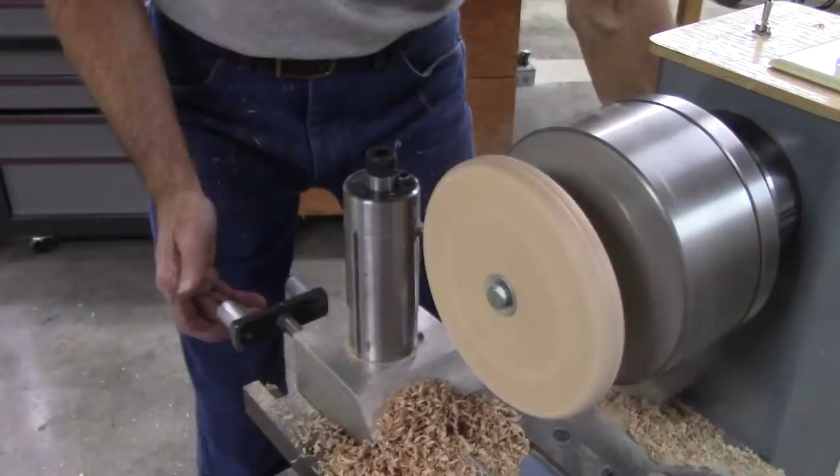I built this wood lathe here, kind of like a metal lathe. It's got a cross feed, a saddle. It's got a power feed. Variable speed. It's got a drill motor powering it, and I've got a light dimmer up here to control the speed.

This video is going to go into how I constructed this lathe, and future videos will go into how to use it. It's also got a tracer attachment on the back. I've made a pulley maker attachment that clamps in the chuck. It's a very capable lathe. I'm really pleased with it.

It's basically done. I'll probably add a few guards. I'll put a guard over my pulley here so I don't stick my finger in it. Maybe put a dust guard over the drill motor down here. But it's basically done. One other thing I'd like to do is hook up a vacuum attachment.

It makes quite a mess. I cleaned up the lathe a little bit, but look at the floor. It's a lot of dust. But anyway, let's get on with the build video, and I think you'll find it interesting.

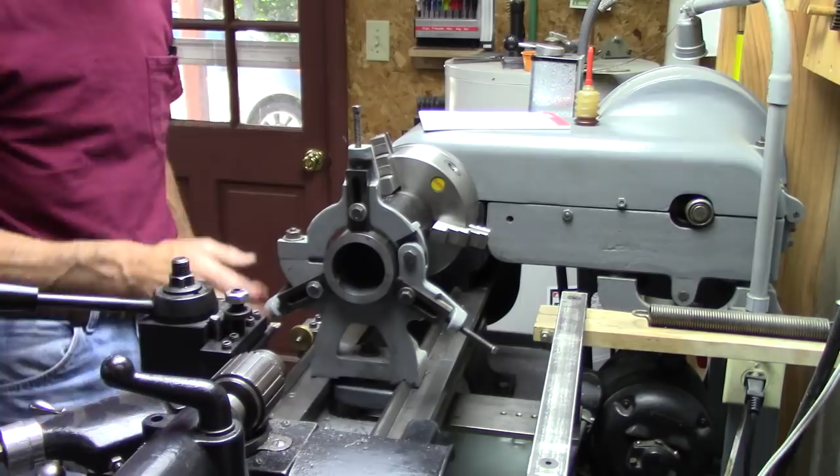Okay, I've still got the lathe set up from cutting this bearing fit, so it should go pretty smoothly. This is the first time I've ever used this steady rest, and it worked really well. Okay, I've got the steady rest all set up. The outside of this tubing, somebody used a pipe wrench on it, and I filed it off pretty good, but it's going to be noisy. It won't hurt anything. But it's going to make a racket. You'll see.

Check my depth of cut here. Taking about 20 thousandths at a time. Okay, we're almost there. I've got some hole gauges, but I don't have a 2 to 3 inch mic to measure that. It's 2 5/8 about. So I'm just going to have to be real careful and go a little bit at a time, keep testing this. I know where I was on the other end. I got the dials marked here, so we'll just keep cutting.

And I think what we're doing now is just taking the spring cut from the boring bar. Yeah, I think I'm going to try to get that with sandpaper. I don't want to go too big. Well, I used a little emery cloth on it. I think it's just perfect now. Good press fit. There it is. That's the spindle bearings.

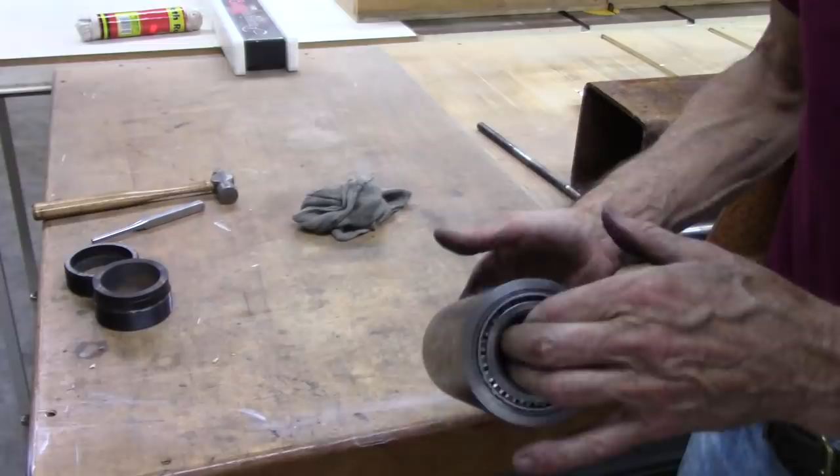Now I think I'm going to put a center in there so I can move this steady rest out of the way. Okay, I've got my steady rest set up. I got a grooving tool here. I'm going to cut a slot right here and put an 1¼ inch locking collar.

This is an 1.5 inch shaft, but the locking collar groove is going to serve something for my bearing to set up against, plus a chuck set up against the other side, and it will allow a relief when I thread this area for the end of my threads. It'll probably be more clear later. I'm using the cutoff support plate that I made. I got another video on that. It really solidifies things. So let's see what it does.

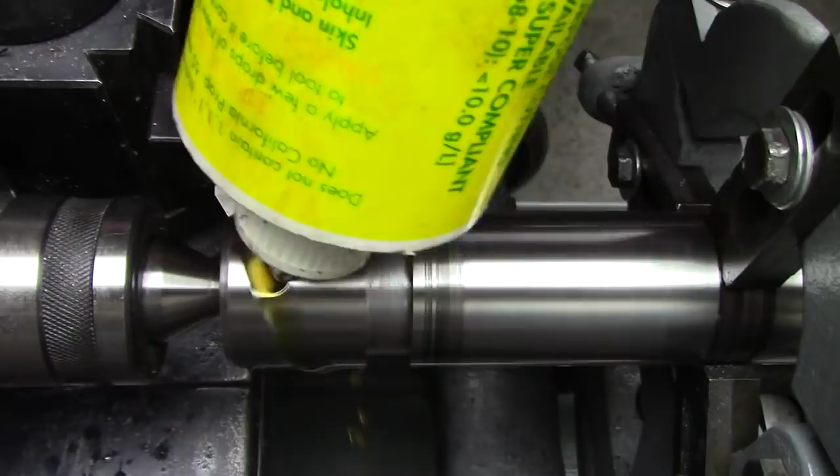Okay, here it goes. Put a little oil on there. See what we can do. I haven't cut threads in a while. Okay, we're just barely touching there. Now we're cutting.

Okay, definitely tight. That won't go on there. Well, there they are. I think my threading tool was a little bit dull, but I think it's going to work out. Chuck screws on there, and after I get that locking collar in there, it will seat and hopefully make it straight. It's fairly straight right now though. And I certainly think it'll be good enough for a wood lathe.

Okay, I've finished the threads and I'm really pleased with them. I'm going to take this out and turn it around and turn this end down for a step pulley.

Okay, I finished the sleeve here and pressed the bearing outer races in on both sides. Now I need to get an accurate measurement from the inner race on both ends. I don't have a caliper that big for dividers or whatever, so I came up with this. I know it's kind of makeshift, but it works. It works pretty good actually. Looks like a little over 8 1/8.

So the lock collar I'm going to get is 1/2 inch thick. So I set the edge of the threads there on a 1/2 inch, and right about here will be where the outer race is on the bearing.

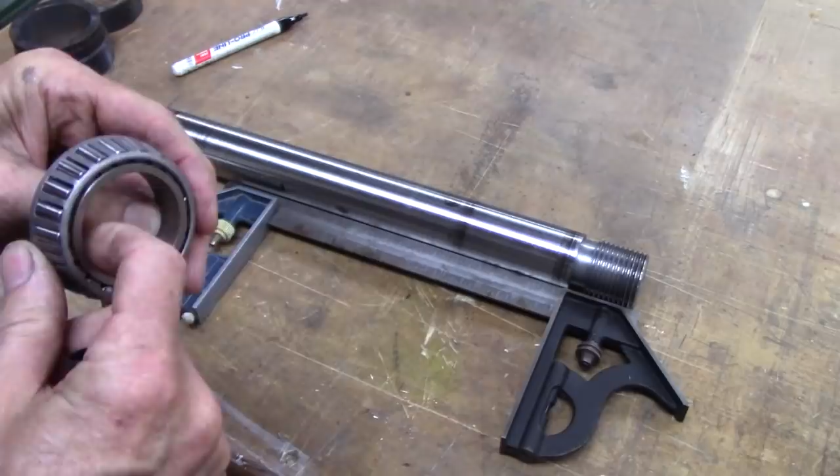I'm going to put 1/2 inch threads and a clamping locking collar on this end. I don't want the threads sitting on the inner bearing race, just a little bit. So I'm going to go in about right there, 1/8 inch in. I know that's kind of crude measuring, but it'll work. And then I'm going to thread from there on out about 1 inch, and then reduce the shaft the rest of the way to 5/8.

Okay, I put the big chuck back on my lathe so that I wouldn't have to clamp on the threads. This chuck's a little deeper, and I was able to clamp on the actual shaft. Put my steady rest back on. It seems to work better with the steady rest. I got my center here. I'm going to turn down this section to 5/8 of an inch. It's quite a bit of turning, so let's make some chips.

Well, there it is. That was a whole lot of turning there, but it's done. It's 5/8 of an inch. I'll have to cut a key in that. And I got to cut some threads right here for a threaded locking collar.

Well, it took some doing. I was going to try to drill a hole and then use a boring bar and make these holes a little bigger. That didn't work too good. I got a problem with clearance on my mill here. Couldn't put a large drill in there and still have enough clearance to drill the hole. So I decided to try a hole cutter. This one's made by Milwaukee. Seems to be a good one.

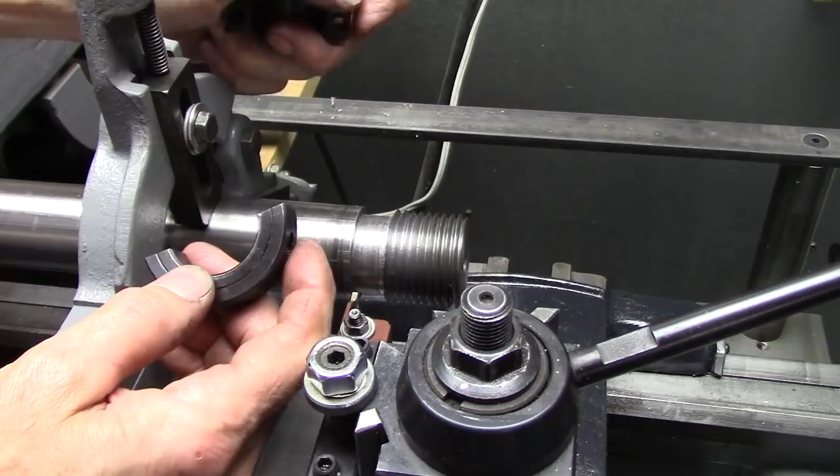Okay, I've finished cutting this groove for my locking collar. I took away from the threaded side a little bit. I got plenty of threads, and I may end up cutting some of them off. That's quite a bit longer than my metal lathe spindle, maybe an 1/8 inch or even a 1/4 inch longer. But yeah, we'll just see how that goes, see how it works with the chucks.

But I think I got a good fit on this. Let's see what we got. I wanted a really tight fit, and I can just barely get that in there. It's exactly what I want. Yeah, it's all the way tight, I think.

Now the real test coming up here is to screw the chuck on there and see if it runs true. Okay, here it goes. I'm not really sure what keeps the chuck centered this way. I guess it's just the bevel on the threads pulling when you tighten it. But the lock collar, or this surface here on your metal lathe, I'm sure helps the chuck stabilize this way.

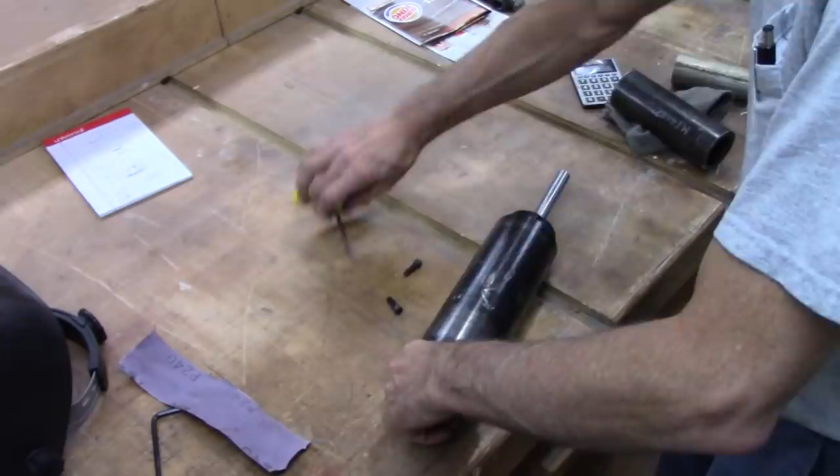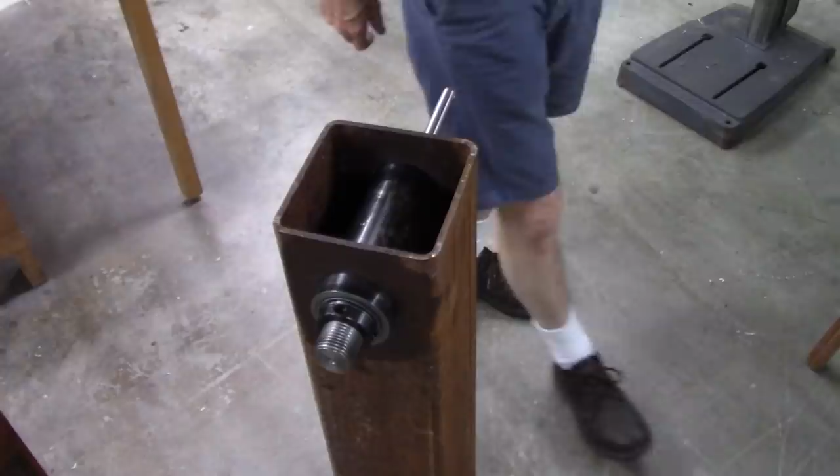Of course, it's noisy right now because I don't have any grease in it, but that's pretty good. Of course, I don't know. I'll probably have to tighten that until I have a little bit of resistance and then back off a little bit. The next step will be to clean up this piece of steel here. And weld that tube into my, I guess you could call it my headstock.

Okay, I'm going to weld this thing. I'm not a welder, so I'm going to do this off camera and wish me the best. Well, there it is. Still a little warm. Like I said, I'm not a welder, but I guarantee it'll hold. That's a lot of surface area.

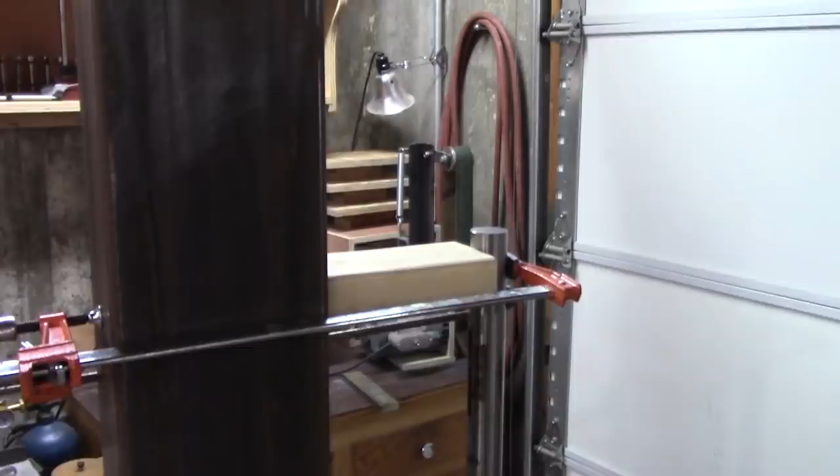Well, I got a metal lathe chuck in there, and I chucked a 1.5-inch bar in there, and believe it or not, I gave it a spin, and there was very, very little run out at the top, no visible run out. Then I clamped some 7-inch blocks in there, and I visually aligned it this way. I'm lined up as near as I can tell perfect. And I know it won't be metal lathe perfect, but it'll be plenty good for a wood lathe. I'll strive for perfection and hope for the best. Well, it's time to weld it.

Just to avoid any distortion, I'm going to weld one side a little bit, then go to the other side and weld. I really don't know, I'm not experienced enough to know how to avoid this distortion, but I'm going to do my best.

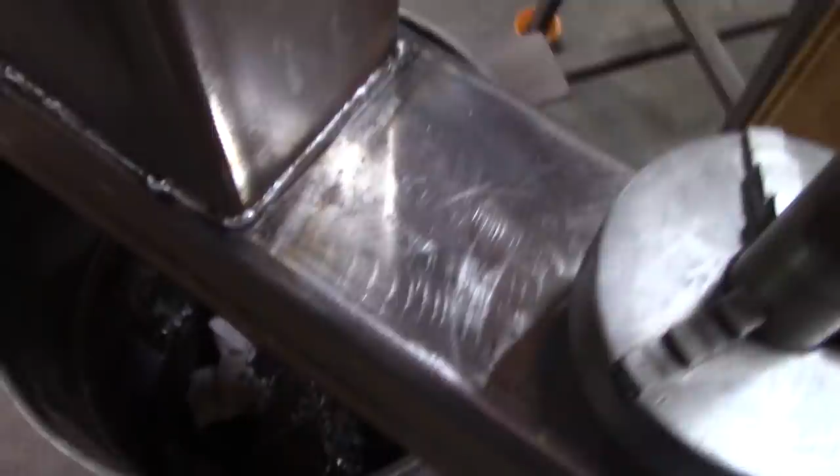Well, I got it all done. I'm getting better at this. I guess you got to learn somehow. Figured out what I was doing. It's a 110 MIG I'm using, and I was trying to get too much penetration and staying in one spot too long. And after I started moving faster, it made a nice weld.

Well, here's what I've done. I decided to just weld a piece of channel on the bottom. It'll have like a pedestal mount here. The bottom support's a little bit longer in the back, because the motor will hang off the back. Next step will be to cut a piece of steel to fit on the top. I got this surplus piece of steel here.

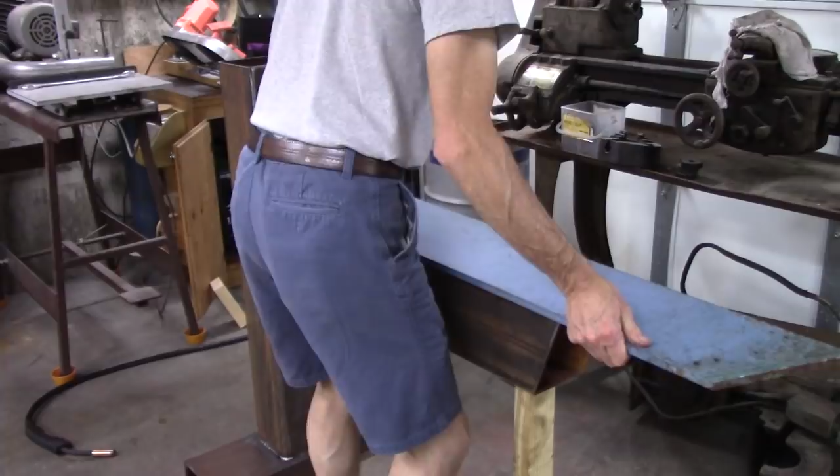And I'll cut that off flush, and then cut it to length here. I was thinking about wrapping it around the headstock. Just about that far. That way it'd give cross slide. I could notch out the cross slide where it gets up close to the chuck. But I'm not sure I'll do that or not.

Okay, I've got my bed plate cut to length, and I've drilled a set of holes to bolt the bed plate to the beam. Also ground a relief right there for the weld, so it sits up against the headstock. I drilled these holes, they're 5/16.

I'm going to countersink them. But I'm going to transfer the holes first. If you're trying to transfer a hole with a countersink, it's hard to hit center. So I'll transfer these holes, and then I'll countersink all the holes. First I've got to center this up on there.

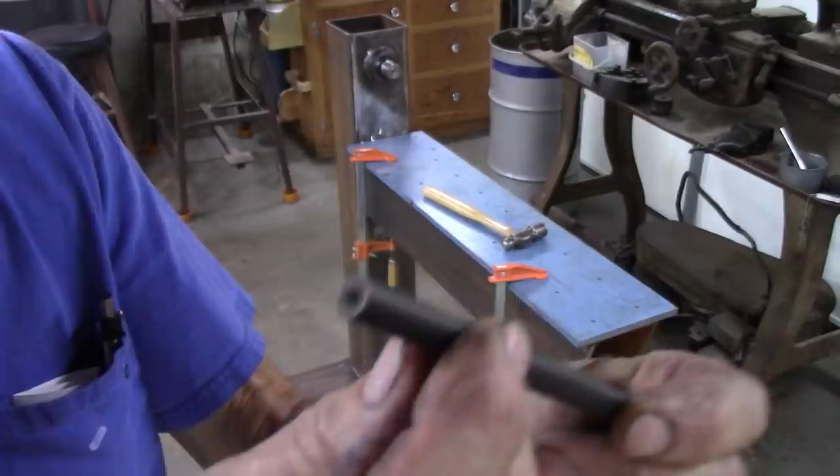Absolute center is not super important, but it's very important that it's square this way because my spindle is square to this beam. Now all we've got to do is transfer the holes. If you haven't got a set of these punches, they're the best thing ever. They're cheap. Highly recommend that you buy some.

Well, this is the easiest way I found to tap a bunch of holes. Use a pointed tap. Some people call them a gun tap. It pushes the chips ahead of the tap, and you can use a drill to tap with. You don't have to back up. Let's see if it fits.

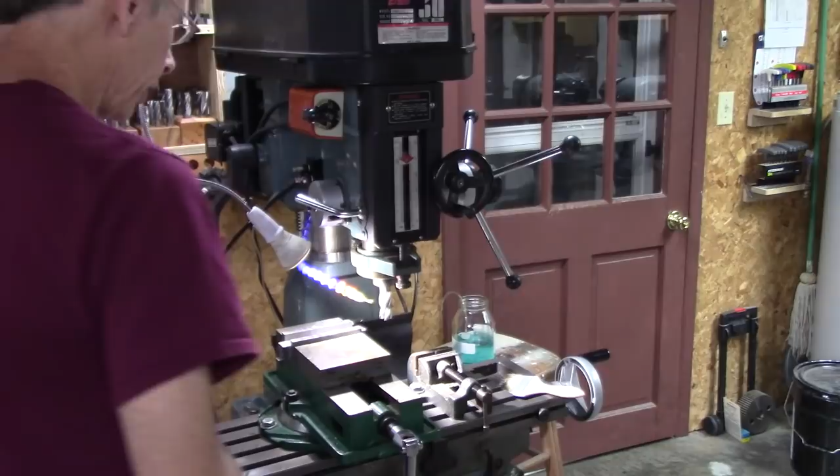I got this one here online somewhere, and it's got two controls. It's got both an air and a fluid valve. And with that, boy, it really works good. I've got an excellent finish on that. I redid that. The original that I had was usable, but it was a little rough. Well, anyway, I got the milling down pretty good.

And then I went to drill these holes, and I forgot to lock down the head on this round column mill. And I got the hole spacing messed up. So I'm going to attempt to salvage this mess up here. What I'm going to do is put in one extra hole and space them differently.

Well, I'm doing it again. I'm trying to be a welder. I've already welded one. This is going to be a cap. I'm going to turn that off on the lathe. Getting ready to weld my second cap. Tack it in 4 places and then

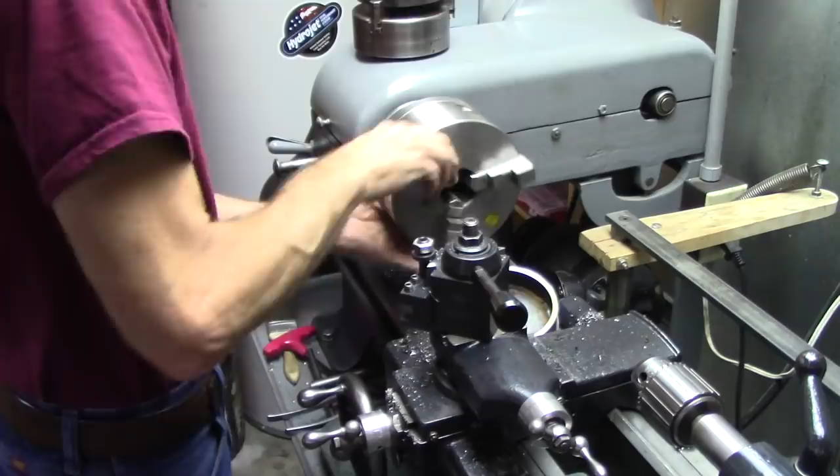Okay, I've got my large chuck on with the outside jaws. We're going to try turning this down. Looks a little dangerous, doesn't it? Well, I just realized something. My smaller chuck will still chuck that piece right there. This chuck is chattering a lot. And I think this one will do a lot better.

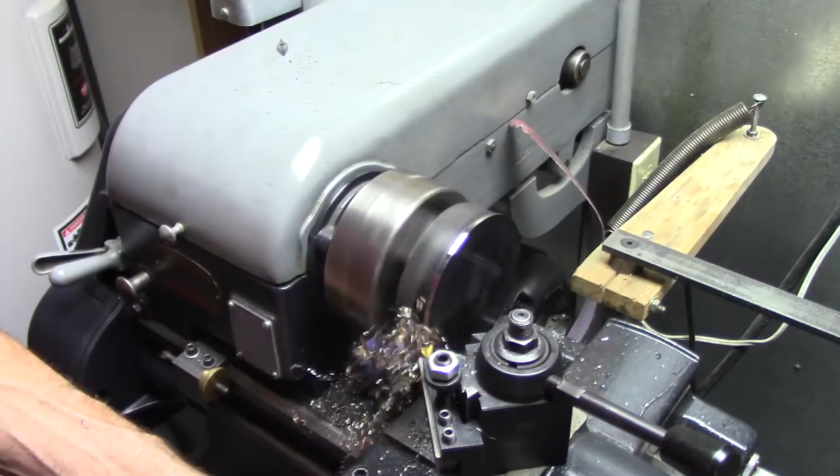See what it does. Ah, day and night. Well, there it is. Now I'll bore a hole in that and use a boring bar, and that'll be a dust cover for my bearings. I'll probably put a couple of screws right there to hold it on. It won't be a seal, but it'll keep wood dust out of the bearings. Not too bad. I think that'll make a nice dust cover.

Okay, I'm going to make this hole first. And I'm going to make it the size of that lock collar. I think I can clear that screw, take the screw out, put the cap on, put the screw back in and tighten it. So I'm going to make it where it'll just slip over that. That's 2 inches, 360 thousandths.

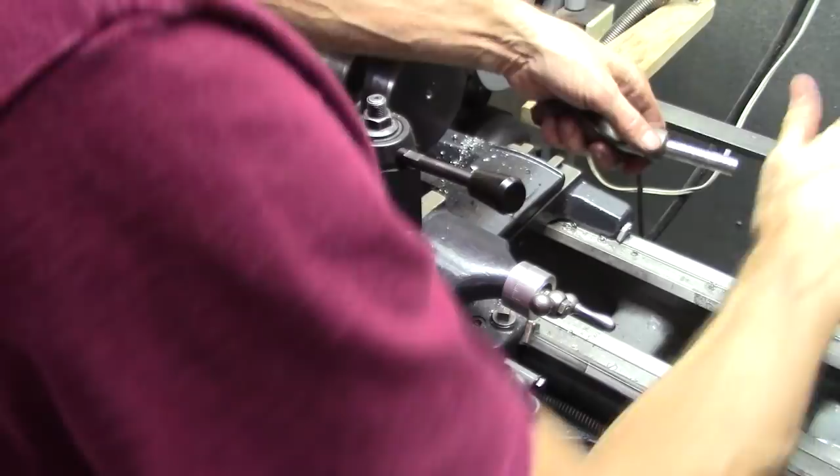Drilled the pilot hole, and 1 inch is as big as I go. So I'm going to have to bore from 1 inch to 2.3. Okay, I just did the math on this, and from 1 inch I've got to go 680 thousandths more. It'll be here a while.

Well, there's one dust seal. It's pretty good. It won't go over the screw. I had to take the screw out and put it on there. Keeping that centered will be critical. I'll just put a couple of screws right there. Once it's tight, it won't go anywhere.

Okay, I've drilled the dust covers for my bearings, and I've already mounted this one. I had to take out the set screws on the lock collar there and slide it on, and then transfer the holes and tap them. Fairly straightforward, but there's a clearance right here. I kind of had to tap it around before I tightened it to maintain that clearance. So I'm going to do this side now.

Okay, I've just kind of eyeballed this. I'm looking for an even gap around the lock collar and the... Looks good. Now I'll just transfer the holes. Looks good.

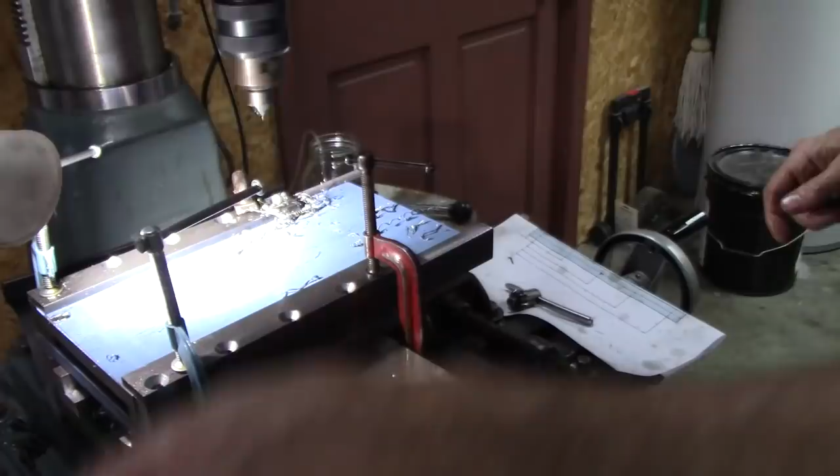Here we go. All the holes are drilled. I've still got to drill clearance holes through this piece right here and then tap this piece. Okay, I'm in the process of tapping these holes. I just got finished with that one. That's the last one on this side, and then I've got to turn it around and do the same thing. I've just used the center to find the hole and then measured 1.5 inches between them.

So. Okay, excuse the mess I've got going here. Too many things going. As always, get too many irons in the fire.

Okay. I took a file to the tops of these holes just to make sure there weren't any burrs on them. Same with the bottom. Same with that right there. So one punch. One punch. One punch. Okay, I've got all the screws in, and you'll notice here, make sure that you can see that.

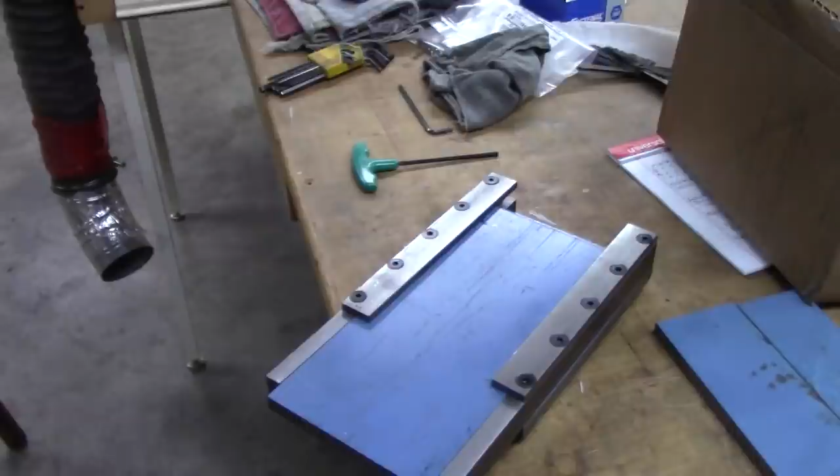That's my cross slide. This has movement. So I can make it tight this way, and I'll have to put shims underneath here. If I tighten these, this won't move. And that's what I wanted. It's pretty close. It'll probably take a 1 or 2 thousandths shim. It's going to be a pain in the neck, but once you get it right, oh, look at there.

Maybe a 1 thousandth shim. Maybe just sand right there. Wouldn't that be something? How about this side tightens up? Yep. I have to have more of a shim on that side. But you get the idea, and I'll have to shorten my bolts or get some 1 5/8 bolts. Yeah, 1 3/4 would be hanging over just a little bit. But I think that's going to work out good.

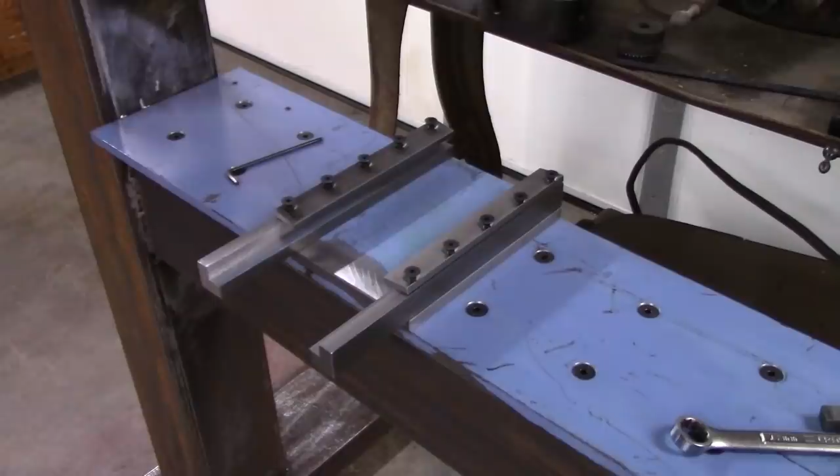Okay, here's my next step. I need to bolt this right here, drill holes and bolt that. And this will bolt on the back side. Like that. And there'll be some nylon tip set screws that go up from the bottom to adjust my clearance. Of course, I've got to make one for the front and the back.

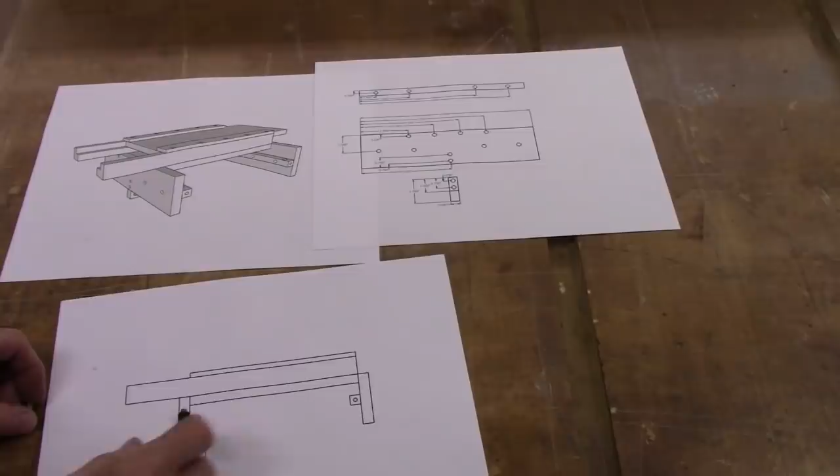Okay, here's a side view of the saddle with the front and the back, and that's for my threaded lead screw. There's a 3D of it. And here's all the holes I've got to drill in the locations. And there's the brass tip set screw that I'm going to use to set the clearance on the bottom. It'll go right there. Well, let's start drilling.

Okay, I'm on center this way, and I found the edge right there. That's my 0. Okay, this has to be threaded. So I've got to switch to a number 7 drill because it's 1/4-20. Well, there we go. Got one bar for the skirt done. I've already done the other one, so I've got both of them done now.

Well, I've started drilling the skirt for my saddle. I've drilled the 4 top holes, and now I'm drilling the holes that will match up with these. I'm just laying that there to verify where I'm at. I'm using the DRO to position it. I just like a double check. These will be 1/4 inch clearance holes.

Okay, I'm starting the second skirt. I've located the edge here. I'm right on the edge, and I've already positioned it depth-wise. So my first hole needs to be 2.75 inches. It's 4.25.

Okay, I'm getting ready to drill the holes in the end of my cross slide here, or saddle. And I had to put a small vise on my mill table to get the needed depth. I've got everything zeroed, centered, and found the edge right there, and I need to go .750 in.

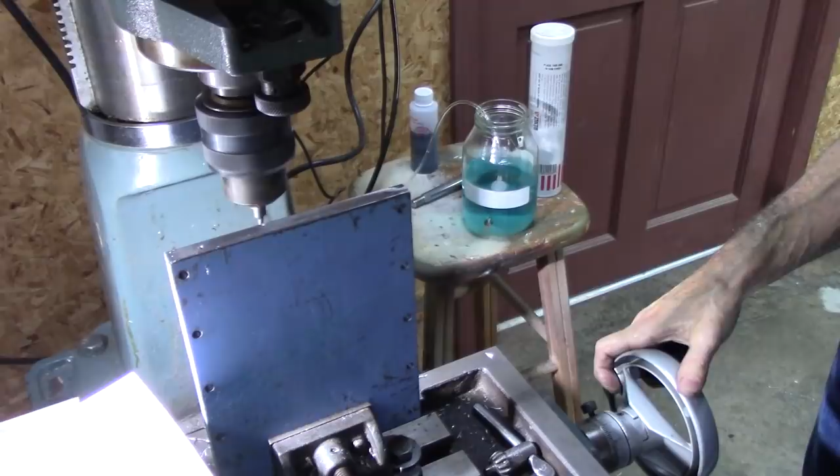Okay, I'm fairly certain I don't have enough screws, but we're going to try putting this thing together. Okay, I opened up these holes just a little bit. I'm going to try screwing on these first. Bottom guide, if you want to call it that. Good enough though. Okay, there's the back side of it. That's where the set screws go, right there.

Well, I'm going to have to take them back off because I was going to drill a little hole for a nylock set screw there so that I wouldn't lose my adjustment on these. So I'll have to take them back off. Okay, this one is the front because it's got the little tab for the threaded piece for the lead screw. So this one will go on the back side right here. Probably getting the idea now.

It'll sit on the back of the lathe right there. So let's just put it on the lathe. And I plan on putting some kind of nylon on the bottom of that to help it slide. But the bottom will stop. The set screws will adjust the play out of it.

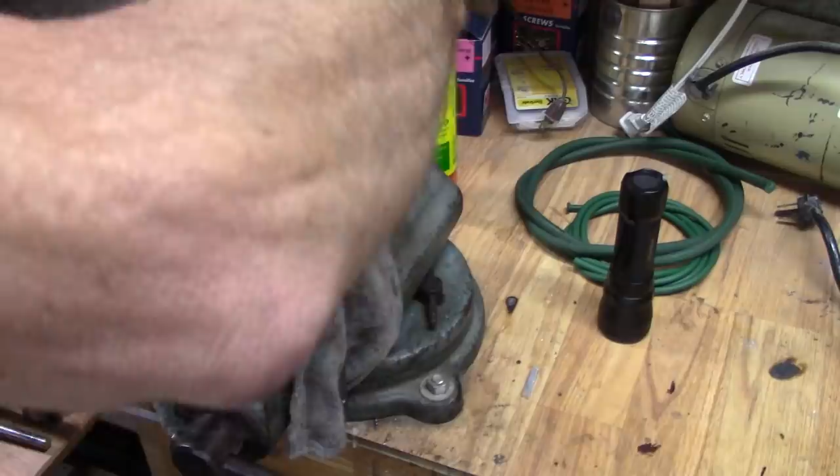Well, it's going together pretty good. There's the, I don't know what you want to call it, guide, brass set screws and a nylon tip. It hooks some of the edge there, and I can adjust the set screws.

First, I'm going to put some of this stuff on there. It's Teflon tape. And I think it's probably going to work all right to make this thing slide real good. If not, I'll replace it with something else. I was thinking about pinning some of that to it. That's UHMW. It's pretty slick. So I'm going to try this Teflon tape.

Yeah, it'll be all right. Oh, that's pretty easy. So, hook's on right there, and this side, it's on here. Now I suspect when I tighten this down that I won't be able to move it. And that's okay, because I'm going to have to put some shims in here.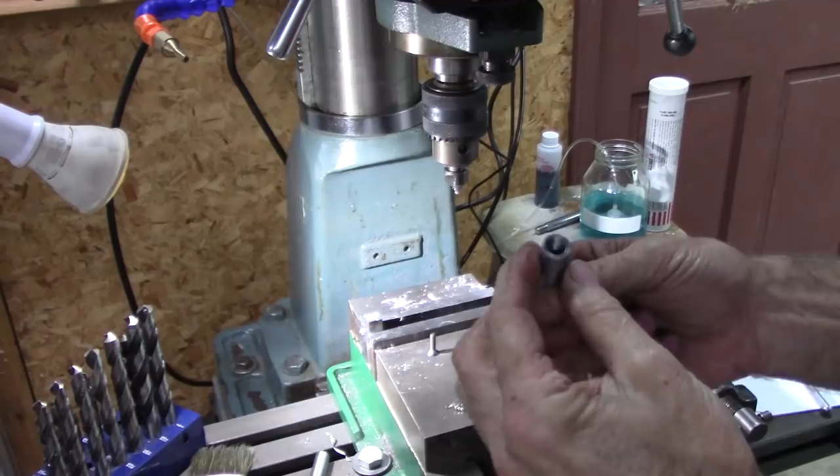Okay, this is part of my cross slide screw. And I built this thing here. I got less than an ideal situation here. I probably should have designed it a little different, but this will work. What I got here is like a coupler. This goes through that piece, and this will screw onto here. And I'll pin that and then pin my 3/8 threaded rod into here.

And this screws onto the bottom of my cross slide. And the part that I don't like is the amount of thrust surface right here, because this will be moving the cross slide in. That's going to be a wear point that I don't like, but I don't have much alternative. I should have designed it so that there was more clearance here, but that's all the clearance I got, so that's what I got to deal with. It'll be more clear when I get it mounted.

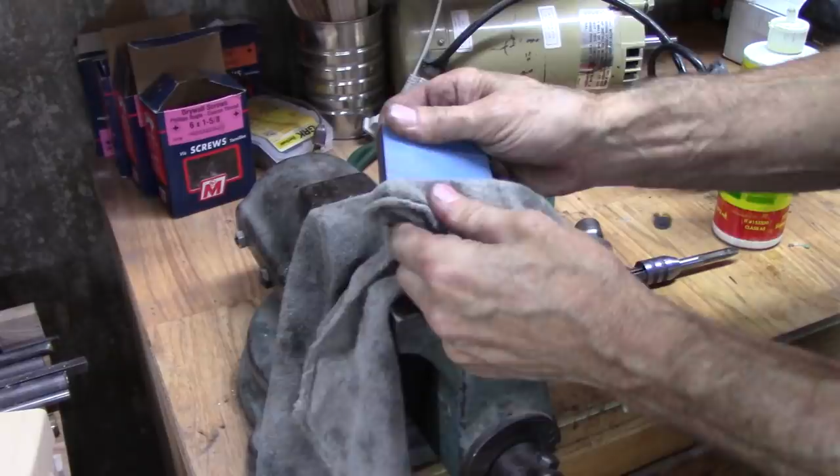Okay, we're looking at the bottom side here, the bottom of my cross slide. That will be where my crank is for my cross slide adjustment. I ran out of socket head screws, so I had to use some 7/16 bolts. Either one's fine. I like these socket head screws though.

Yeah, I used 3/8-16 threads, so one turn is 1/16 of an inch. Kind of handy for woodworking. There we go, that works pretty good. A little bit tight, but I expected that.

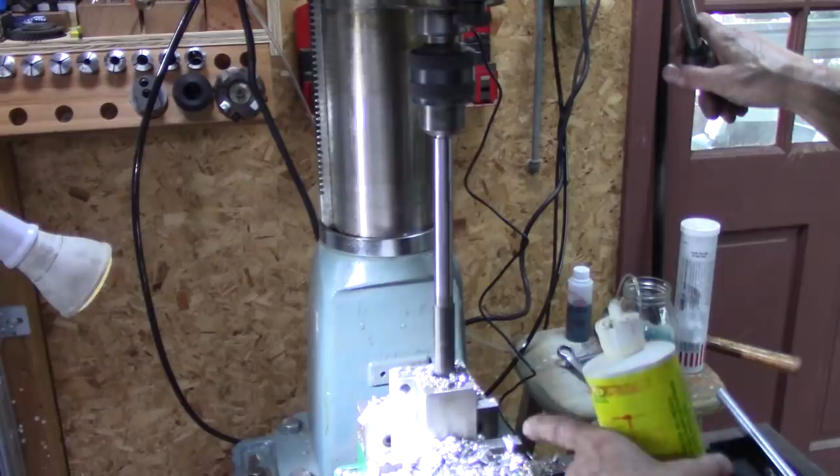Well, I found this big aluminum block, and I'm boring a 3/4 inch. Actually, I'm reaming a 3/4 inch hole. I've already drilled a clearance hole, and this will be the block for my cross slide, the bearing block, that sleeve bearing.

This is just some surplus steel I had, or aluminum rather. Already had mounting holes in it. It'll just be my crank and the lead screw connect right here. This is a spring-loaded tap guide. It's a way of keeping the threads straight, which is fairly important on this.

And I think I'll probably just let the threads ride inside that. Maybe not. I haven't really decided yet. It probably wouldn't. There's no stress on the lead screw there. I'm not sure what I'm going to do yet. But on this end, I made the shaft for the lead screw kind of long. And the reason I did that, I'll probably have the crank right here.

The motor, zoom up there a little bit. I'll have like a stepped cone pulley here and another one back here, so the belts will be running, the motor will hang back here, so this will be all clear of the belts. But by having this long shaft here, and I don't know if I'll do this or not, but it allows me the option to put a large pulley on there and a small one here and have the cross slide motor driven, driving with the cross feed. I don't know if I'll ever do that. I'll probably just use it manually, but at least it'll leave that option open by having that long shaft there. So my next step is to build the other end of this lead screw rod.

Oh, and if I haven't mentioned it before now, all the threaded rod is 3/8-16, or 16 threads per inch. So one turn will always move 1/16 of an inch. Now on the cross slide, interesting thing about the cross slide is that it'll move this in 1/16 of an inch, but it'll change the diameter 1/8 inch of whatever I'm turning.

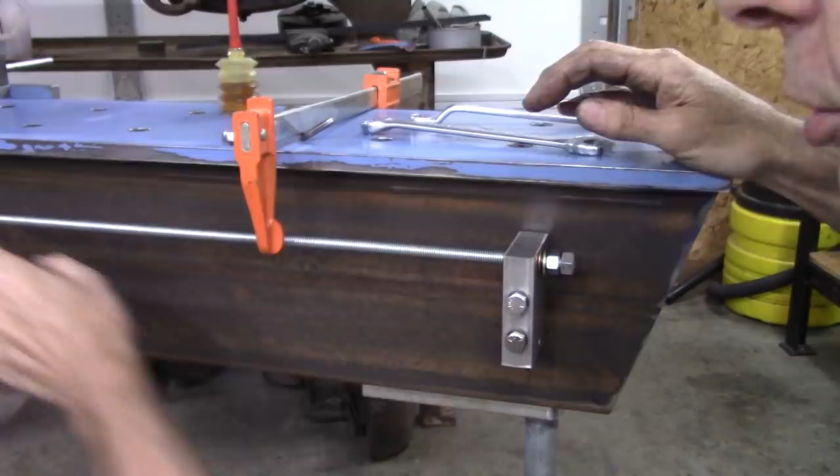Okay, I got the lead screw cut off, and I need to come up with a little bit shorter, little narrower washer, because it's got to clear this right here. I want to eliminate any backlash. Well, seems to be pretty good.

Oh, it's a wobbly lead screw. I'll probably lubricate that lead screw with dry lube, like a moly lube or a graphite. Look at that lead screw wobble. Sure be nice to get some straight threaded rod, wouldn't it?

Well, I fired up the welder, took some old surplus steel and made a motor mount, and I should have this thing running in a few minutes. We'll see.

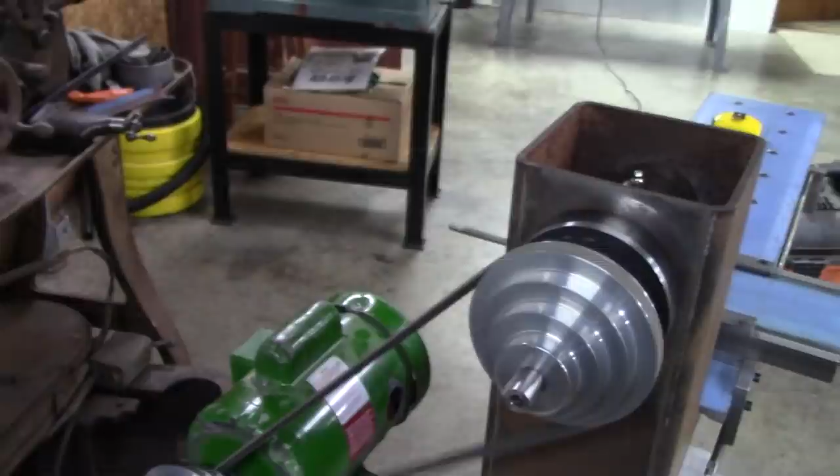Let's see what it's going to do. Yeah, look there. It's just an old drive belt I had on hand. It's not in very good shape, but it's looking good.

I got this idea about a tool post, and you know, on a metal lathe you got this tool post. You can put about any kind of cutter you want in there, and I'm going to build a tool post for the wood lathe, kind of similar. I've milled a slot in there, and I just cut this to length, and I'm going to true it up with my metal lathe here. You'll just have to wait and see how this takes shape. May not work, but I think it's going to work good.

Got to be careful here not to take off too much. It's not a good way to hold it in the chuck. I believe that did it. Yep. It's got a seam right there. I want to take that seam out of there. So I'm going to have to use a boring bar for that, and I'll probably go about that deep. I'm going to have to take it pretty slow because that's not very well supported. Looks pretty true though, doesn't it?

I guess I went a little too fast. Okay, I think this will probably work better. I put my larger chuck on. It holds more of the tube. Had a little bit of trouble with that tube deflecting with my other chuck. Put the longer boring bar on too.

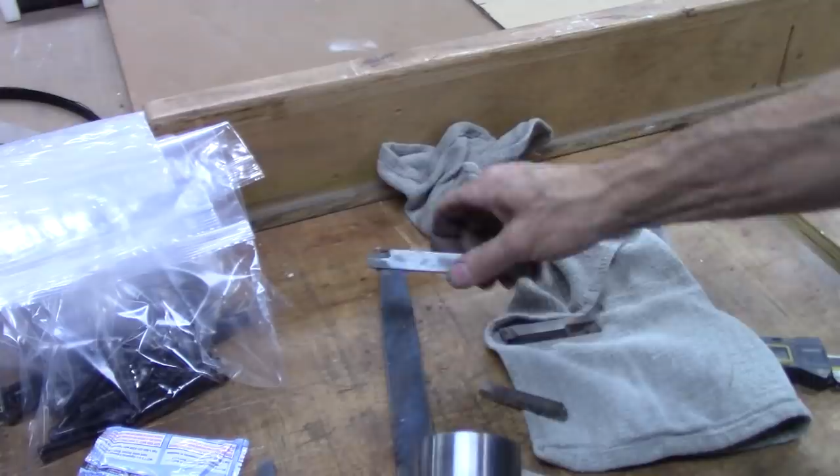Here's something I use for cutting a groove, round groove. Put it in there, indexes to the top of the cutting surface, same thing. Here's a metal cutting carbide tip cutter, clamps in there to the top. It doesn't matter which size tool I use, it always clamps to the top of the cutting surface. So now I got to weld the top on this, drill a center hole to mount the post, and 2 screw holes right there lined up with that slot to pull this up.

I've got the steel slug, if you want to call it that, for the inside of my tool post, and I've made this slot parallel to my vise, just eyeballing it. Right here I've got a center, just a recess from a drill I did in the lathe, and a center drill here, and I'm going to use that center to measure from. I'm using my XY table on my drill press. Pretty darn handy. This won't be exact, but it'll be close.

I could use an edge finder and go from this edge, but I want to drill 2 holes. Those will be my clamping bolts. Okay, there's center. Now, I want my bolts to pull up from the edge of that slot, but I can't have it too close to the center because that'll be the mounting bolt for my tool post. So I'm on center here, so I want to go from center the same amount in both directions.

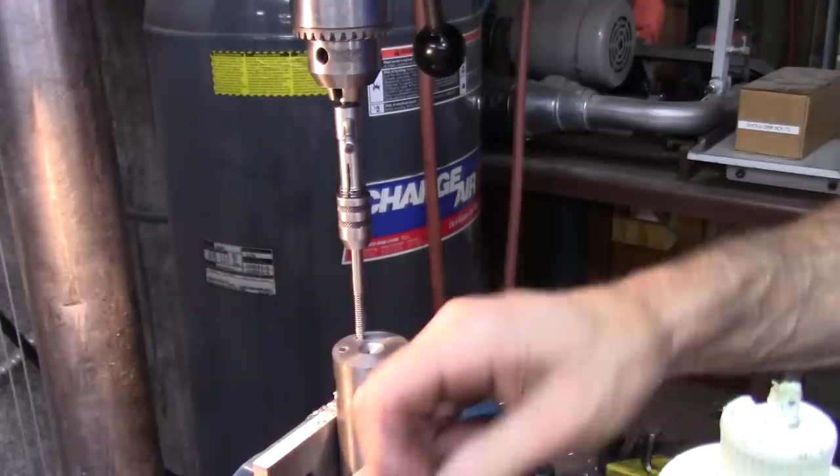This is number 7 drill because they're going to be 1/4 20 bolts. I'll probably start out with a tapered tap and then use a bottom tap to get to the bottom of those holes. Well, I drilled that hole, took a new bit and drilled real slow and was able to just catch the edge of that slot.

Well, I think I went down about 1/8 of an inch of good threads there. I think that'll be adequate. Okay, I just drilled two holes 600 thousandths apart to match up with these holes, hopefully. And yeah, may have to get shorter screws. Nope, that worked. That worked. Perfect. And I screwed up again. It'll work fine now.

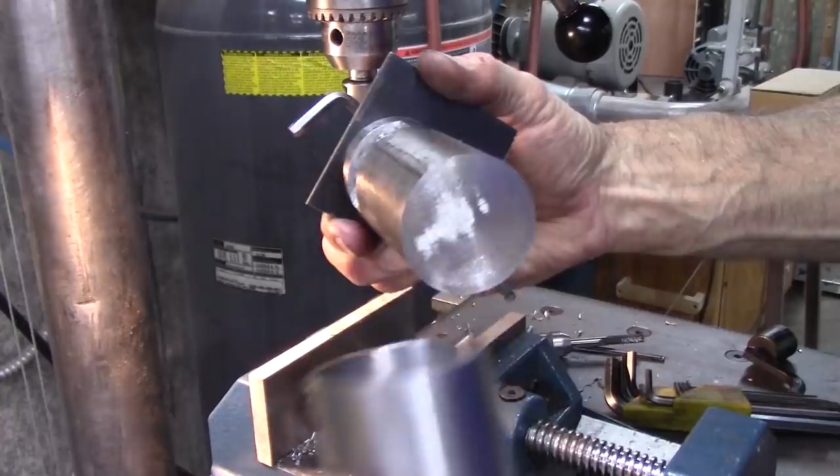I will now weld that right there. I screwed up because I almost got it too small. Well, I should have drilled the holes in further. Anyway, I'll weld that right there and then I'll trim it off on my lathe. I turned it in my lathe, a little recess right there to get better penetration of my weld, and then I took a piece of threaded rod in there, just the right thickness. The threads are kind of collapsing, but it'll keep everything tight. I'm using these screws to pull it up with. Which is essentially the same way I'm going to clamp my lathe tool.

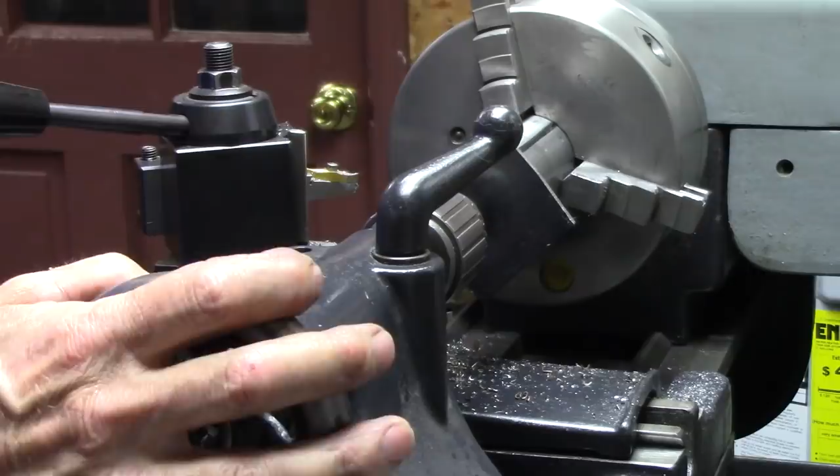Well, there's a pretty bad weld there. Oh, hot too. But it'll work. I'll go cool that off and then trim it up in my lathe. Okay, I'm going to drill a center hole here. This will eventually be the post that I mount the tool holder to the lathe with. The reason I did that is I want to support it with this live center.

Figured out the best tool to use on this. One I don't care about. It's just a cheap brazed carbide tool. Need to go a little more.

Okay, I've assembled it. Got some pitting. That one was already there, but where my weld wasn't so good. But the lathe cleaned it up pretty good. The way you use it, put that tool in there like that and just tighten up these screws. There you go. The cutting edge is on center, at least if my tool post is on center. Cutting edge is always on center, or close to it. Depends on how you grind the tip.

You know, that's just slightly lower than the top of the tool, but it'll be pretty close if I wanted to use that. And this is a wood lathe, so being dead on center is not going to be extremely critical. I like it.

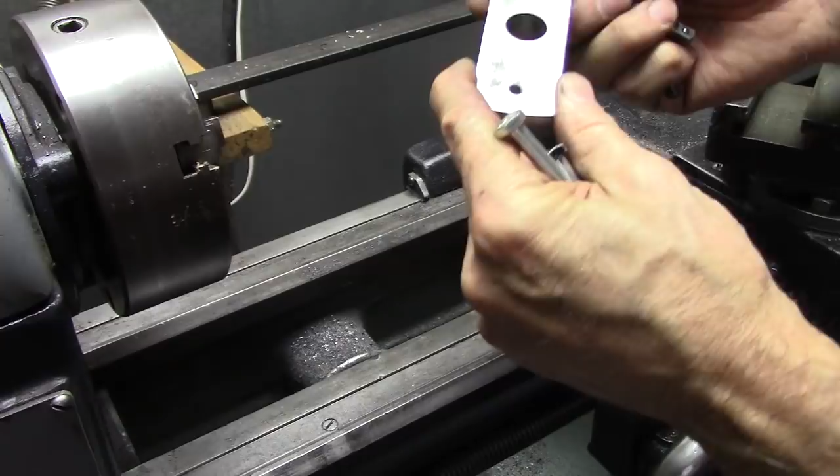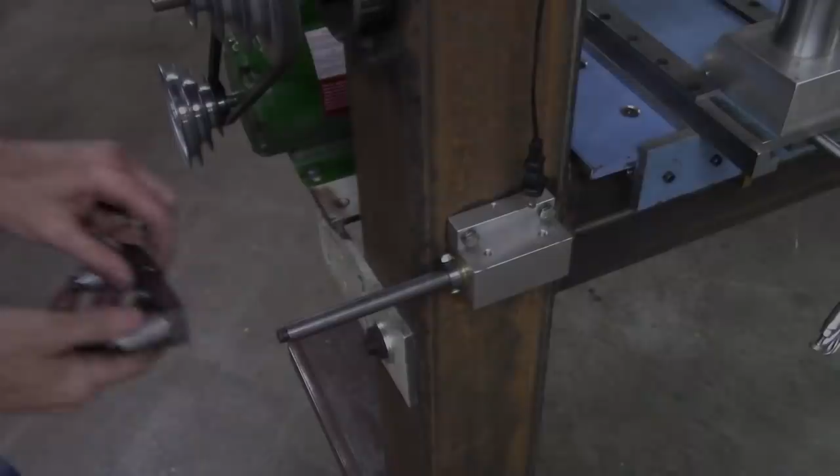Well, I'm building a hand wheel here. I thought I had some from another project, but I guess not. Got these left over from another project. I'm going to drill those out to 1/4 inch. Yeah, took a pair of bolt cutters, cut that off and ground the threads, and I'll bottom out the threads in my hand wheel. I've made hand wheels like this before, it works pretty good. A little sloppy, it'll be alright. A little bit crude. I might improve on it later, but for now that's good enough.

Well, this lathe is getting more complex by the moment. I'm going to build a tracer to work on the wood lathe, similar to what I had on the metal lathe. And I kind of overlooked one aspect. It's going to complicate the design a little bit, but it'll make it fun. What I did to use the tracer on the metal lathe is I removed this cover right here. It's just to keep the chips out of my lead screw there. And this screws onto that same place. I'm not going to demonstrate it, but I'll show you basically how it works. This sits back here.

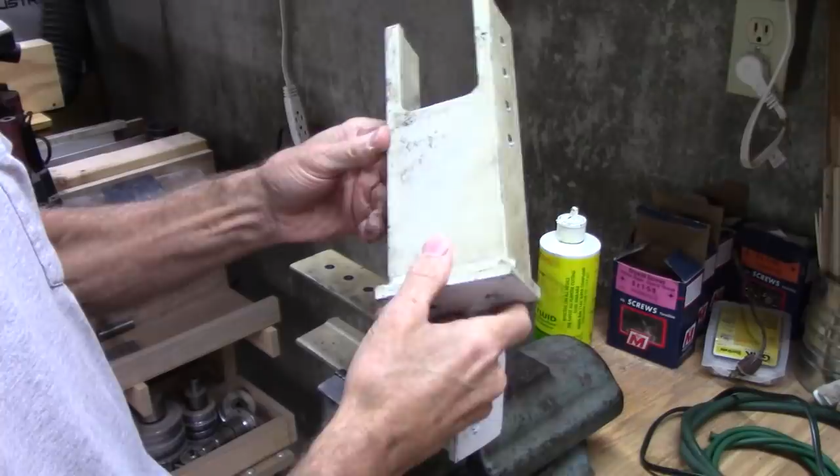This is some surplus steel I had. My wife wonders why I grabbed this stuff. This is going to be a bracket to hold the tracer pattern. I'm going to tap these holes. It'll give me a variety of different positions for that tracer pattern. What I'll have here is 2 standoffs and this plate mounted up on top with countersink screws. This right here will have a bearing on the end of it that follows my template.

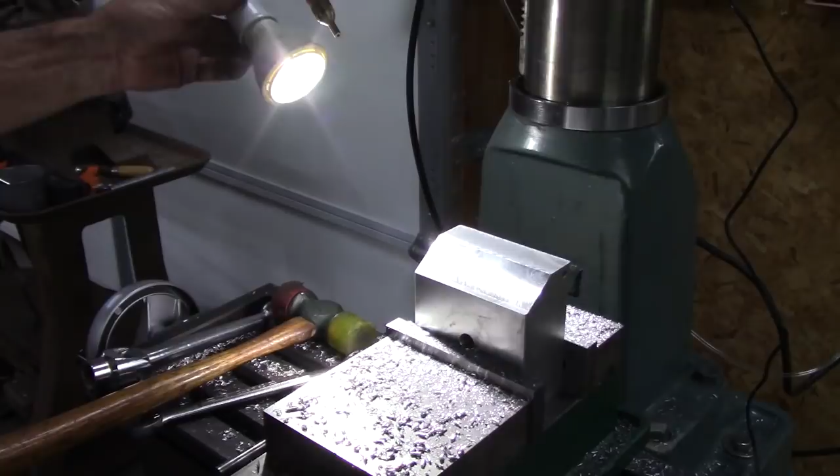Okay, I milled off the aluminum block that I had mounted on the cross slide just to make it square. I had it ground off previously. Now I'm going to drill a 3/8 hole there. Okay. Good. That'll be my adjustment. I'll have a knob right here and either a nylock nut or a clamping lock collar on this side so that the thread stays stationary. It'll pull this back and forth. Those shoulder bolts will be right in there. Next step is to drill those shoulder bolts.

Well, the lathe is coming along. I've got the follower mounted now. That's a depth adjustment of cut. But you can see it'll follow the pattern really good. Of course, this will be spring loaded. But I don't like cranking here. I need some kind of speed adjustment.

I thought about at one time mounting a pulley from here to here so that the spindle drives the lateral feed. But that, I'd have to come up with a clutch to disengage and engage, and then a reverse is even more of a problem. So I started looking at little servo motors. Something about right here, and have a sprocket and chain. But that was running into a lot of money. So, got to thinking, what is variable speed and reversible? And I came up with a solution, hopefully.

Here it is. A no-name drill. I got it for 12 bucks. It was on sale. Normal price is $17 though. That's not bad. Fairly powerful, variable speed, works in both directions. The only problem is mounting it and making it convenient to change speeds, and I don't want to reach down and pull the trigger, but I got an idea. First thing I need to do is dissect it and see how it's put together. I may cut the handle off and mount it on the lathe. I'm really not sure what I'm going to do yet.

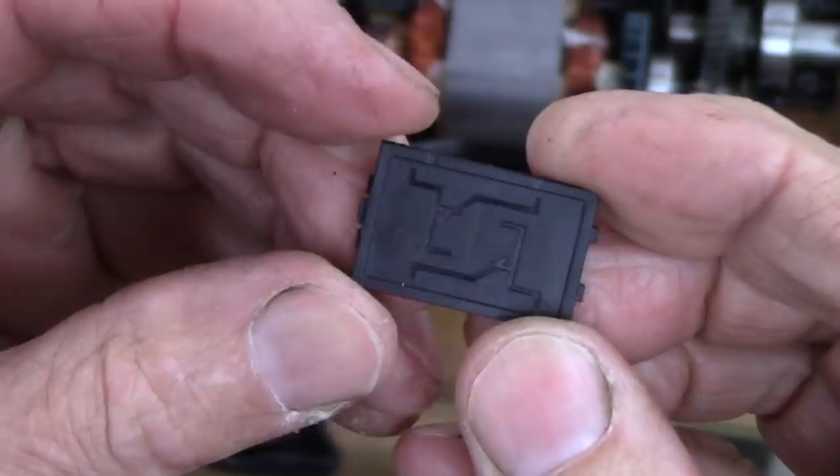Okay, not making a lot of headway yet. Power comes into the trigger control, and this little switch popped off the top. That's the reversing switch, and it's got, let's get it under the camera here, a diagram on it, which is probably going to give us some clues. Okay, the way I'm reading this diagram, in one direction these two wires will be connected, in the other direction these two wires will be connected. But let's test my theory with the ohm meter.

My assumption was correct. There's a forward or reverse, and that's the other forward or reverse. I don't know which is which, but it switches directions on the drill. So this is just a reversing switch. And this appears to be, let's see what we got in there. I think it's half-wave rectifier speed controls, like a light dimmer.

Let's try something. I'm already at the point of no return. So if I bypass the switch, successful. Now, if it'll reverse, I don't know. Oh, perfect. Good deal. Figured out how to make it work for my application.

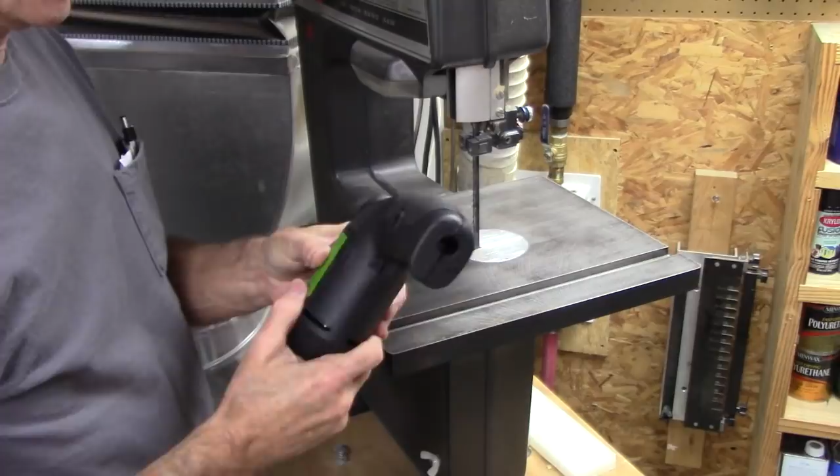Okay. I got all the wires stuffed in out of the way, I hope. And I'm going to cut that off. Cut the handle off. I want to leave that screw right there. This one won't matter, but these 2 hold the drill case together.

Well, it took a little doing. Didn't have all the stuff I really needed to do it right, but it's good for a test. Got a lot of stuff laying on the bench. It's a good way to get electrocuted. In the neutral position, nothing. One direction. Reverse.

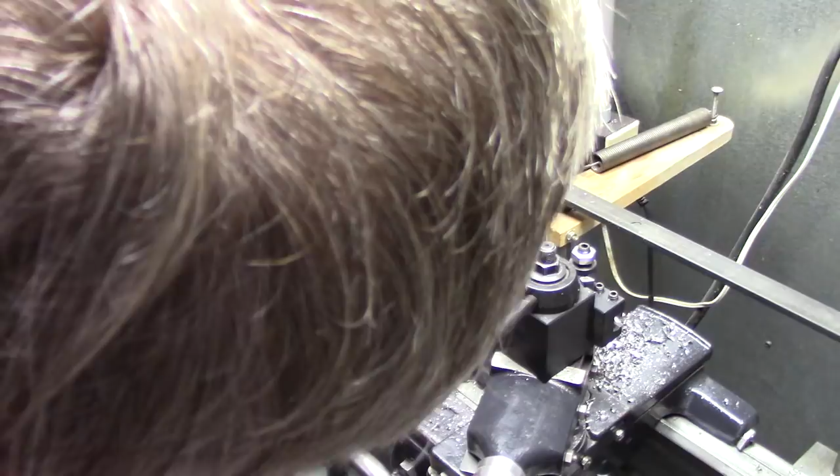Well, I've chucked a piece of scrap aluminum, industrial surplus again, in the four jaw. And I'm going to enlarge that hole, kind of off center, put a couple of bolts through it and cut it in half and use it for a clamp to hold that electric drill onto my lathe. Let's see how it works. See what I'm doing? It was an existing hole and I'm cutting out that right there.

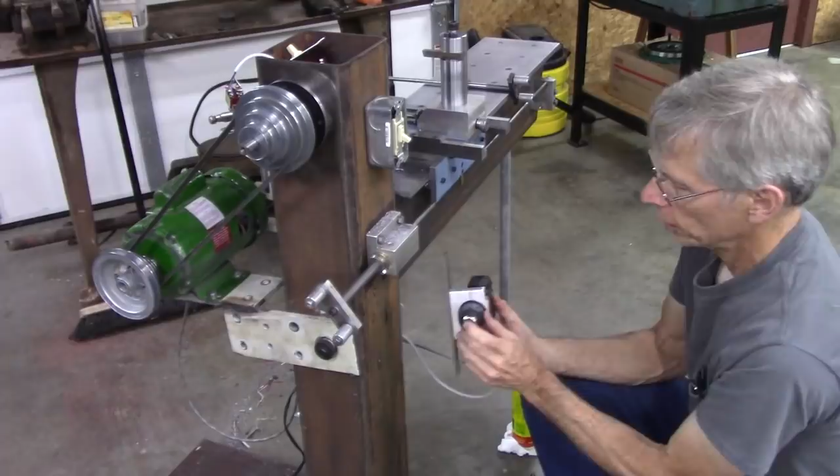That'll be mounted right here. And I'll chuck a 5/16 or whatever size my sprocket is, shaft in there, and mount my sprocket on there, and mount another sprocket here. That'll be my chain adjuster. I've ordered sprockets, I don't have them yet. I got a 30 tooth and a 9 tooth. So it'll be a reduction of about 1 to 3.

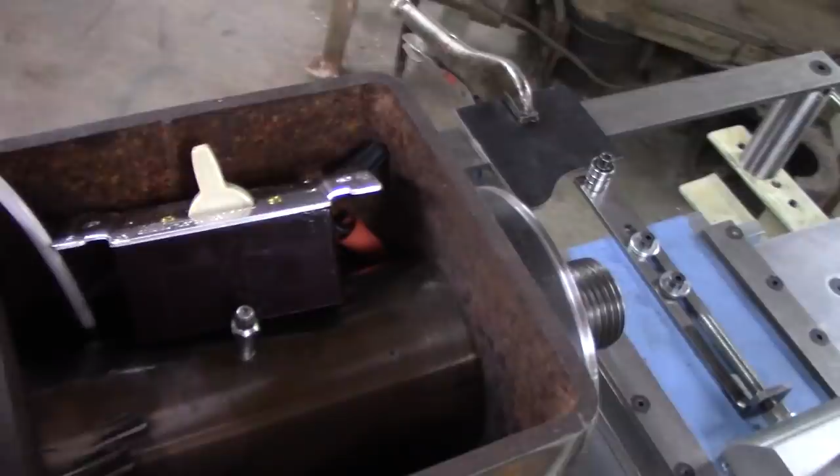Well, there's my chain tensioner. Oh, I like having a mill. Cutting slots like that is pretty handy. I mounted the power switch, and this dimmer will mount on the top, and so will this momentary reversing switch, forward and back. The motor obviously has a switch to turn it off and on, but the dimmer and this switch always have power, but it's not until you momentarily turn it on that it changes directions, or is powered. I got the power to the motor coming out the back, and I drilled holes there, probably not UL certified, but it's good smooth holes there.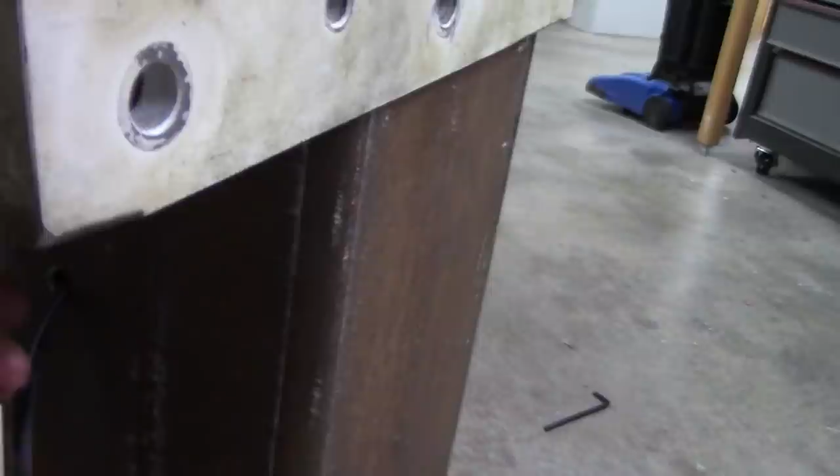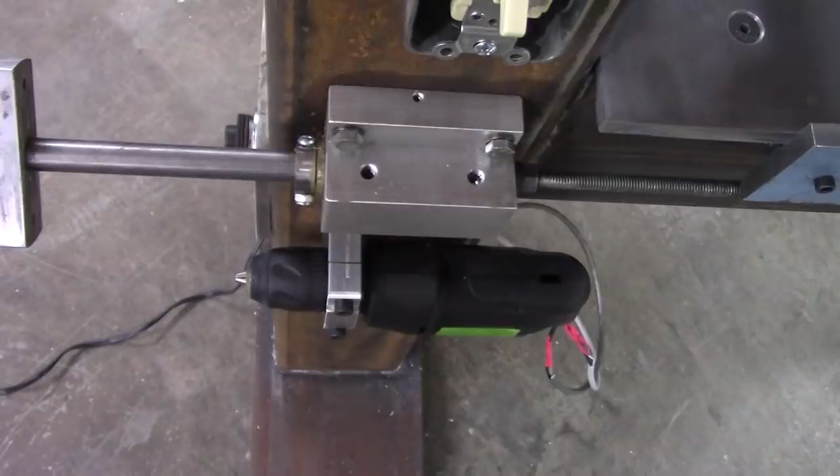And I wired them up through the tube here. I'm going to put a wood plate on the top to hold the switches. And if I want to change some things around, it'll make it easy to access it. But I got power now. See, that works good. Now, I don't electrocute myself. See, one direction, looks pretty good.

What I'll do is these wires here, in hindsight I should have left the drill trigger on here. I could have kept all those connections inside the handle, but I'll push these wires in here, and I think what I'll do is make like a wire clamp and, I don't know if you can see that or not, just kind of clamp them to the square tubing there.

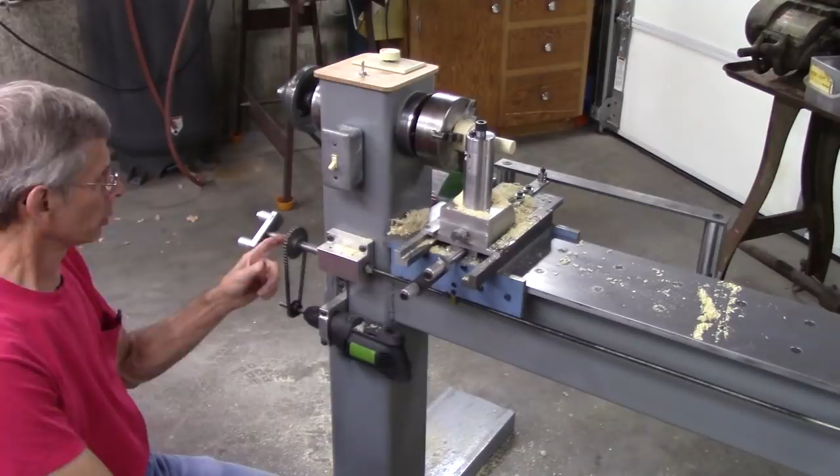Well, I got one of the two sprockets that I ordered, the larger one. That was supposed to be a 9 tooth, but I had a 16 tooth and I put it on there just to try it. I may end up getting a larger one here. I'd like the drill motor to run a little faster. It'll give me a little more control over the speed. But here's what I got. Works pretty good, but sometimes at low speed, if you stop and start, it kind of stalls. It'll be better when it's geared down. Okay, I haven't got a tailstock built yet, but this will show you what it does. You definitely need a tailstock.

Well, thanks for joining me. That concludes part 1 of the lathe build video. This turned out to be a lot longer video than I thought. Part 2 will be the construction of the tailstock. It was quite an undertaking by itself, but it'll be a lot shorter video than this one.